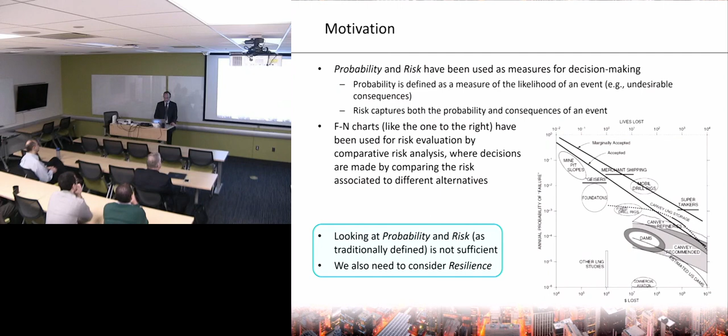However, looking at probability and risk alone is not sufficient. We also need to consider resilience. So today I will present a roadmap to promote societal well-being. I will introduce the concept of resilience, both as one of the most pressing characteristics of infrastructure and communities, as well as a necessary information for risk evaluation and decision making. I will introduce the concept of sustainability and its link with social justice.

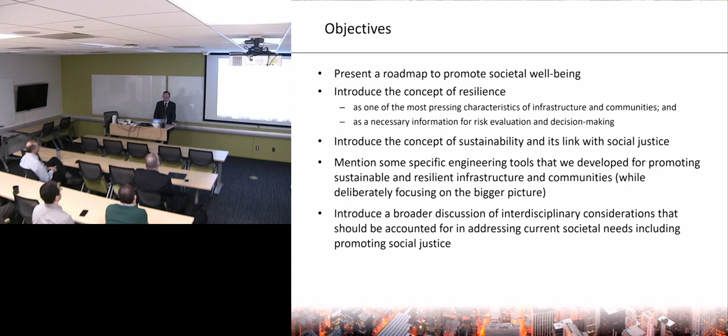While I will deliberately focus on the bigger picture, I will also mention some specific engineering tools that we develop for promoting sustainable and resilient infrastructure and communities. And finally, I will introduce a broader discussion of interdisciplinary considerations that should be accounted for in addressing current societal needs, including promoting social justice. This is the outline of my presentation, and I'll start by talking about regional risk analysis.

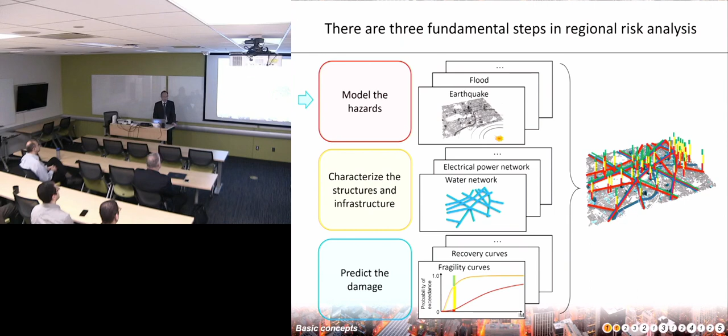There are 3 fundamental steps in regional risk analysis. We need to model the hazards, we need to characterize the structures and infrastructure, and then we need to predict the damage. So in terms of modeling the hazards, communities might be subject to multiple hazards like flood, earthquakes, tornadoes, fire. And accurate hazard modeling then requires accounting for the temporal aspects of the hazard. For example, for seismic hazards, sequences of main shocks and aftershocks all contribute to the overall damage. For weather-related hazards, climate change is impacting the likelihood of occurrence and magnitude of extreme events.

So as to the seismic hazard specifically, which will be largely the focus of my presentation today, we develop a 2-step method to generate main shock, aftershock, ground motion sequences. First, we use the branching aftershock sequence model to generate main shock, aftershock sequences of earthquake characteristics, like location, time, and magnitude. And then for each occurrence of an aftershock, we generate synthetic time history using stochastic ground motion models calibrated using aftershock data. In addition, accurate hazard modeling also requires accounting for the spatial variability of the hazard.

For example, in a region within 30 to 50 kilometers from an earthquake source, directivity effects might induce higher values of intensity measures along specific directions. The shape of the basin and the specific topography might result in amplification effects. And the characteristics of the soil and scattering phenomena might change the propagation path of the seismic waves. These factors limit the accuracy of the traditional ground motion prediction equations commonly used in seismic hazard analysis. And so we develop high-resolution, 3-dimensional, physics-based models that can capture these aspects.

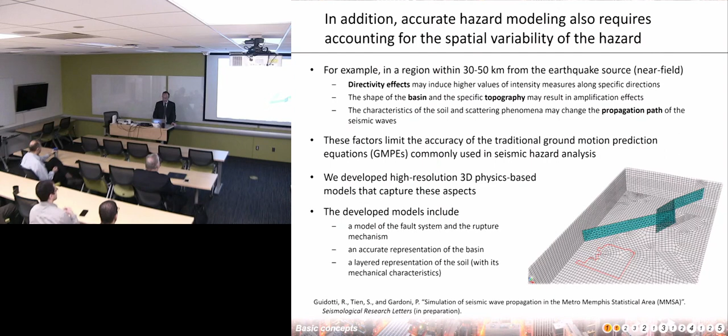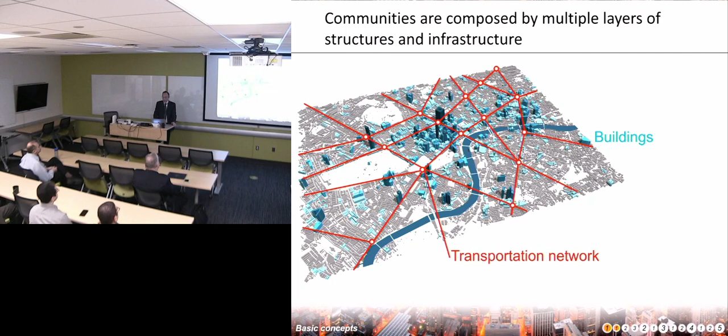Communities are then composed of multiple layers of structures and infrastructure. We have buildings, we have a transportation network, we have a power network, water network, just to mention a few. Each network then consists of a number of different elements. For example, in the water network, there are elements that serve the following 5 key functions: supply, transmission, treatment, pumping, and storage of water. The elements can then be divided into linear elements, like pipelines, tunnels, and canals, and point or nodal elements, like tanks, reservoirs, treatment plants, and pumping stations.

For a given region of interest, we need to define the footprint of each network. The footprint of each network might exceed the footprint of the region of interest. Different networks might have different footprints, and the definition of the footprint of each network depends on 4 key factors: the type of information of interest, whether it's physical damage or loss of functionality, the existence of easily recognizable physical boundaries and the possibility to model the boundary conditions, the existence and location of strategic elements that need to be included, like generation nodes, and finally, the modeling of the damage propagation among infrastructure systems.

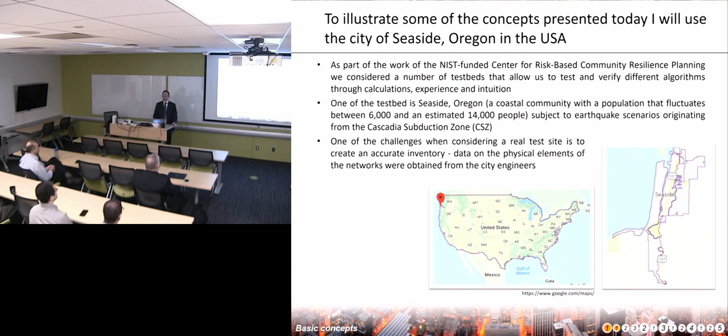To illustrate some of the concepts that I will present today, I will use the city of Seaside, Oregon. As part of the work of the NIST-funded Center for Risk-Based Community Resilience Planning, we consider a number of testbeds that allow us to test and verify different algorithms through calculations, experience, and intuition. One of the testbeds is Seaside, Oregon. This is a relatively small coastal community with a population that fluctuates between 6,000 and 14,000 people in season. They could be subject to earthquake scenarios originating from the Cascadia subduction zone.

So for Seaside, we modeled the water network at the city level because this is a self-contained, self-sufficient system. The transportation network is modeled at the county level and then extended to the larger city of Portland. The electric power network is modeled at the state level in order to be able to run a power flow analysis.

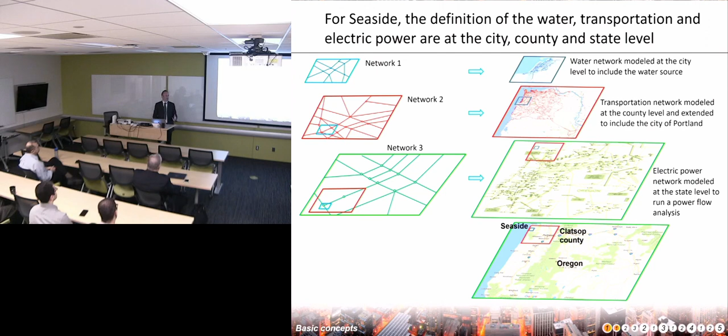Once we define the footprint of a network, we also need to define its granularity, if we want, the resolution of the model. So we define a tributary area as the area served by a single network node. And then by changing the tributary area, we can define networks with different levels of granularity. And in the limit, the most refined model considers each single parcel or house lot as a tributary area. Then the nodal value of the quantity of interest is the spatial average over the tributary area.

And in terms of modeling, different granularities affect our ability to describe the spatial variability of the impact over the area of interest, and I'll say more about this in the next slide, affect our ability to describe the changes in the network capacities and demands following a disrupting event, and affect our ability to describe the recovery process, since a skeletonized network would only include the main distribution line, but not the smaller ones.

It is important to capture the spatial variability of the impact over the area of interest because certain population groups might be more impacted than others or recover more slowly, and tributary areas that are too large would underestimate the actual societal impact. So the detailed network allows us to capture the variability within the larger tributary areas used for the skeletonized networks.

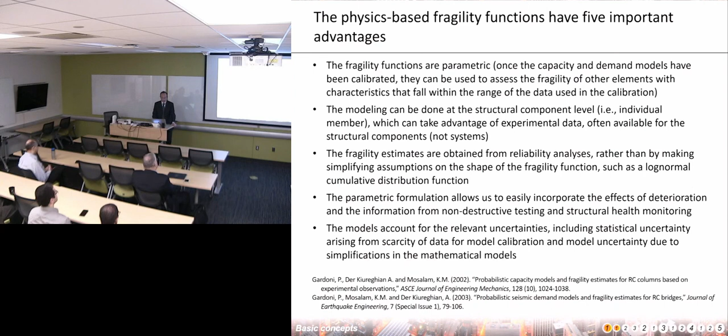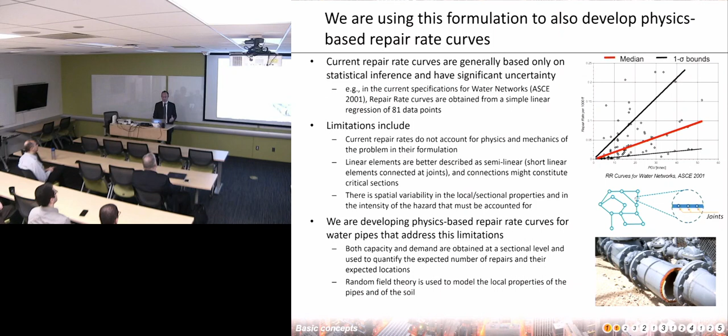We are now using the same formulation to develop physics-based repair rate curves that are intended to replace the purely empirical repair rate curves that can be found in the literature.

So far I talked about individual elements in the network. Then we need to bring in the connectivities of these elements, or if you want, the topology of the network. And this can be done using the adjacency matrix A, which is a matrix of ones and zeros, where 1 indicates that there is a direct link between two elements in the network, and a 0 indicates there is no such direct link. The adjacency matrix can be used to convert the physical damage to the individual components into its impact on the overall network.

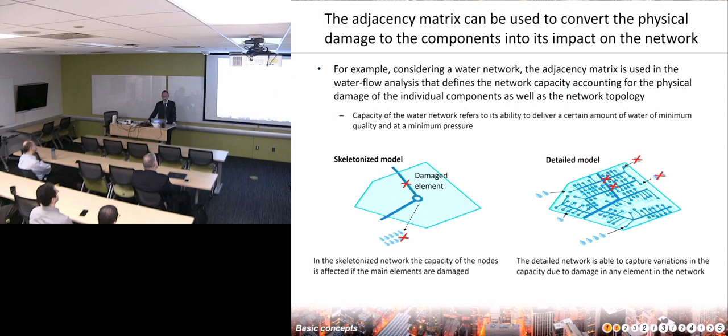For example, considering a water network, the adjacency matrix can be used in a water flow analysis that defines the network capacity, accounting for the physical damage of the individual elements, as well as the overall network topology. Capacity of the water network here refers to the ability of the network to deliver a certain amount of water of minimum quality at the minimum pressure.

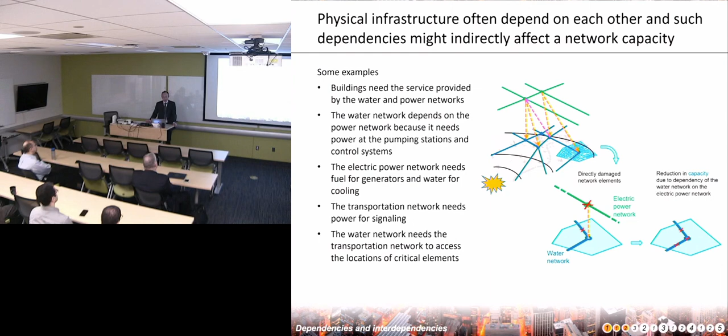Physical infrastructure often depend on each other, and such dependencies might indirectly affect a network capacity. For example, buildings need the service provided by the water and the power networks. The water network depends on the power network because it needs power at the pumping stations and control systems. So as a result, even if a network has no physical damage, there could be a loss or reduction of functionality of such network because of the physical damage and the corresponding loss of functionality of a supporting network.

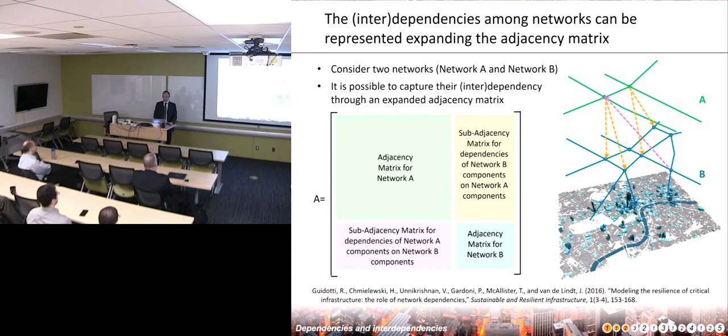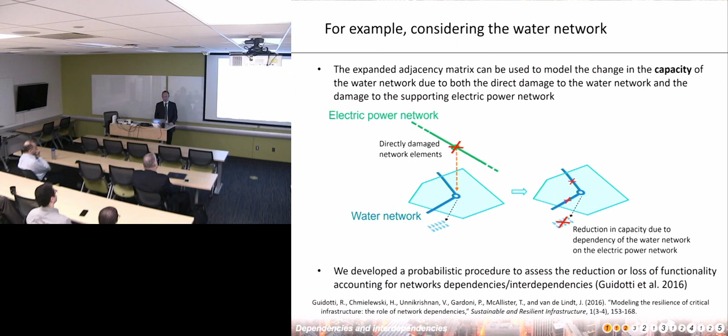For example, considering a water network again, the expanded adjacency matrix can be used to model the change in the capacity of the water network due to both the direct damage to the water network as well as the damage to the supporting electric power network. But not only the capacity, also the demand can be affected by dependencies. For example, building damage can lead to people dislocation that then affects the post-event water network demand. So the updated network capacity and demand can then be used in a flow-based network analysis to assess the functionality and reliability of the network.

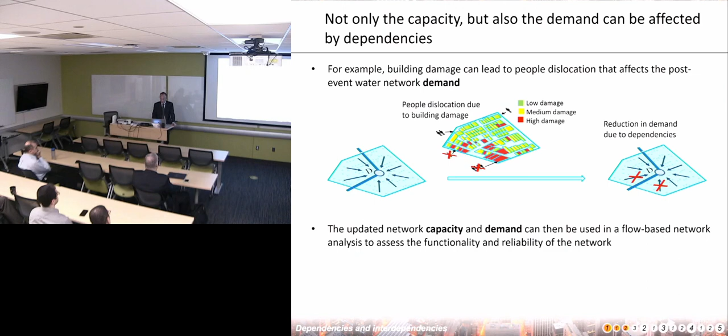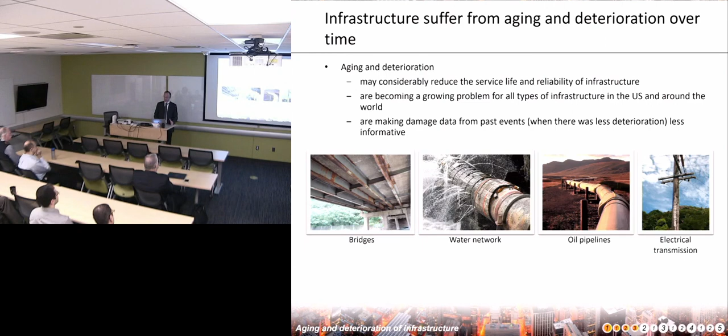Infrastructure might be subject to multiple deterioration mechanisms, which could be gradual, like corrosion or alkali-silica reactions, or shocks, like damage from past events. And changes in the material and geometry, what I called before the state variables, can lead to higher vulnerability to hazards, higher fragility curves, higher repair rates, and higher probabilities of failure or reduction of functionality. There could also be interaction between different deteriorations that can accelerate the overall deterioration process. However, current formulations available in the literature typically do not take into account the possible interactions between these different deterioration processes. So we develop a state-dependent formulation to model the deterioration accounting for these interactions.

The deterioration of the state variables x, or if you want, the first derivative with respect to time of x, is modeled as function of the external conditions z, as well as their own state. And then the changes in x lead to changes in the capacity of the system, as well as in the demand. And the updated capacity and demand models can then be used to estimate the time variant probability of failure. For example, considering a reinforced concrete bridge subject to corrosion and seismic excitations, the occurrence of seismic shocks accelerates the overall corrosion rate. So results show that considering the interaction of the two deterioration processes considerably affects the lateral stiffness, leading to significant changes in the fragility.

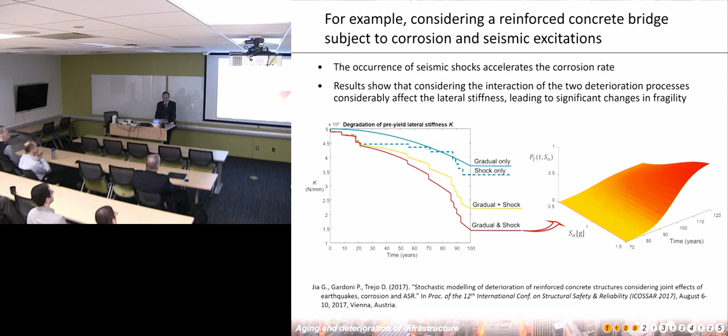There are also spatial variabilities, both in the state variables as well as in the external condition z. So we develop an improved latent space approach for modeling non-stationary spatial temporal random fields using physics-based regressors. A spatial temporal random field V is the collection of random variables at different spatial locations s and time t, and the non-stationarity means that the properties of V vary in space and time. So the proposed formulation considers different regressors as latent dimensions and then models the mean, the standard deviation, and the correlation in the random field as function of these latent dimensions. So the proposed formulation allows us to include the influence of physical regressors with a clear physical meaning in the definition of the random field.

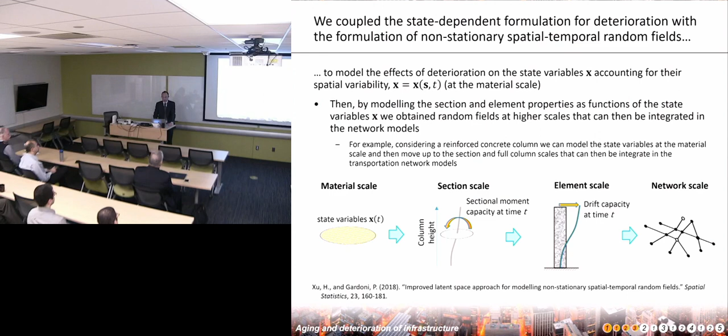We then couple the state-dependent formulation for deterioration that I showed you earlier with the formulation of non-stationary spatial temporal random fields to model the effects of deterioration on the state variable x, accounting for their spatial variability. All of this is done at the material scale, and then by modeling the section and element properties as function of the state variables x, we can obtain random fields at higher scales that can then be integrated in the network models. So this brings us back to the networks and the collection of networks that constitute the infrastructure in the region.

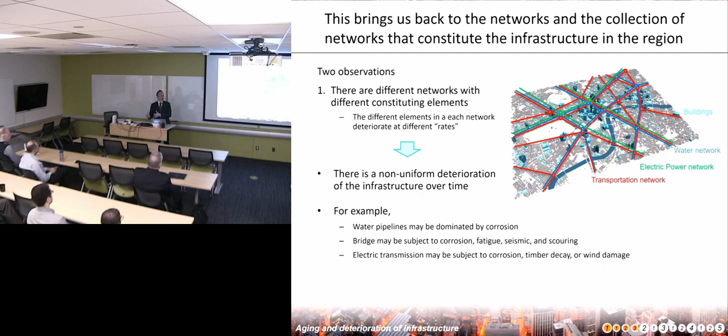So I have two quick observations. The first is because we have different infrastructure and each infrastructure is constituted of different elements, the deterioration rate can be very different, and a snapshot at time 0 can be different from a snapshot in 20 years or 40 years. The second observation is that even if we have two identical elements in the network, for example, two identical bridges, because of the spatial variability of the conditions that lead to gradual and shock deteriorations, their deterioration can be very different.

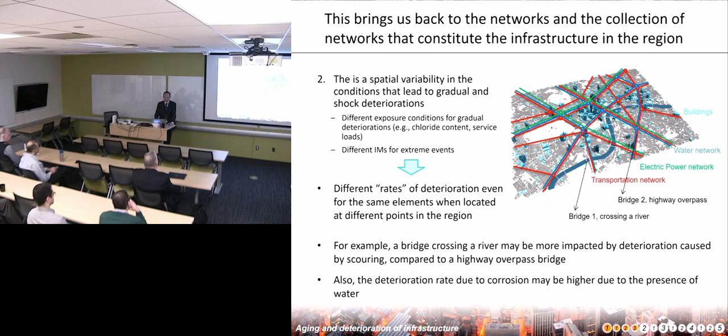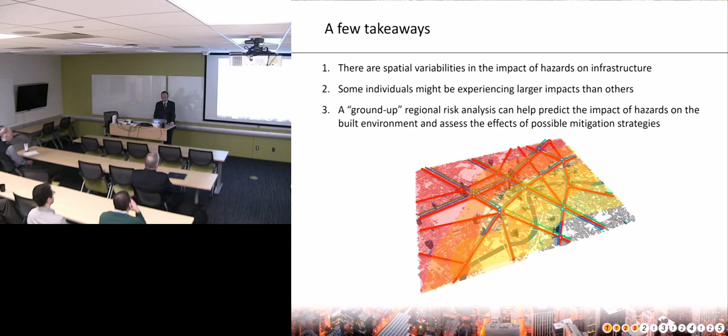So a few takeaways from this first third or so of my presentation. There are spatial variabilities in the impact of hazards on infrastructure. Some individuals might be experiencing larger impacts than others, and what I call a ground-up regional risk analysis can help predict the impact of hazards on the built environment and assess the effects of possible mitigation strategies. To look at the impact on the society, we then need to talk about social vulnerability.

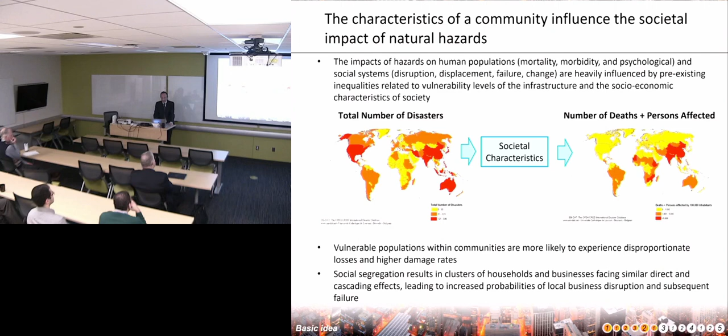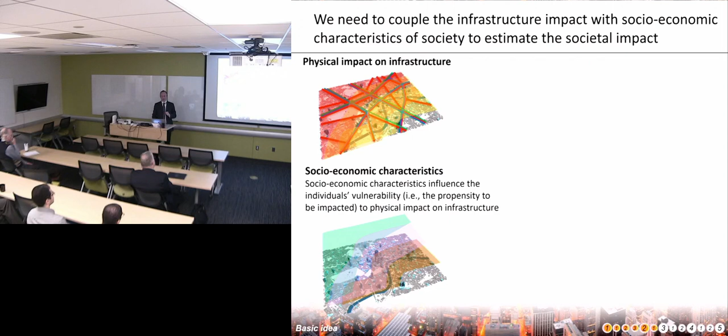The characteristics of a community influence the societal impact of natural hazards. The impact of hazards on human population, in fact, is heavily influenced by pre-existing inequalities related to the vulnerability levels of the infrastructure, as well as socioeconomic characteristics of society. Vulnerable populations within communities are more likely to experience disproportionate losses and higher damage rates. So we need to couple the infrastructure impact with the socioeconomic characteristics of society to then estimate the societal impact.

So we proposed a capability approach for assessing the societal impact of hazards. As background, Nobel Prize-winning economist Amartya Sen and philosopher Martha Nussbaum developed the concept of capability in the context of development economics and policy. The United Nations has adopted a capability approach to rank the well-being of individuals in countries around the world. There are two key ideas, functioning and capability.

Functioning refers to what an individual does or becomes in his or her life that is of value. Capability refers to the specific functionings that are feasible to an individual to choose to achieve given what he or she has and what he or she can do with what he or she has. So capabilities, or if you want, the opportunities that individuals have, are seen as dimensions of the individual well-being. So we propose to conceptualize and quantify the societal impact of hazards in terms of capabilities. So the impact of a hazard is captured by how it affects the genuine opportunities that individuals have.

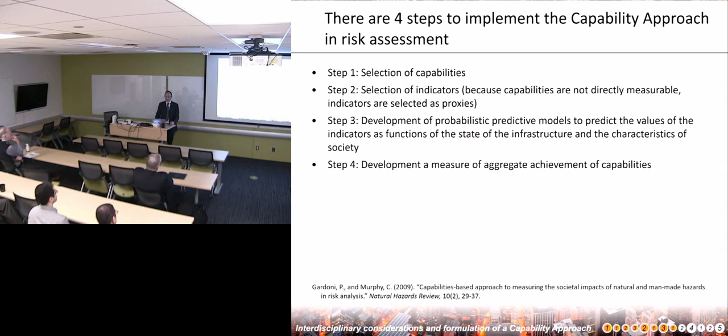There are 4 steps to implement a capability approach in risk assessment. First, we need to select the capabilities. Then we need to select indicators because the capabilities are not directly measurable, and so indicators are used as proxies. Then we need to develop probabilistic predictive models to predict the values of the indicators as a function of the state of the infrastructure as well as the characteristics of the society. And finally, we need to develop a measure of aggregate achievement of the capabilities.

So in terms of selecting the capabilities, there are 3 main considerations: significance and relevance, parsimony, and orthogonality or incommensurability. Significant and relevant means that the capabilities must be relevant to the problem of interest. Parsimony means that we need to choose the smallest subset of capabilities that include all important dimensions of well-being. And orthogonality or incommensurability means that each capability must provide information that is unique and that cannot be ascertained from any other capability.

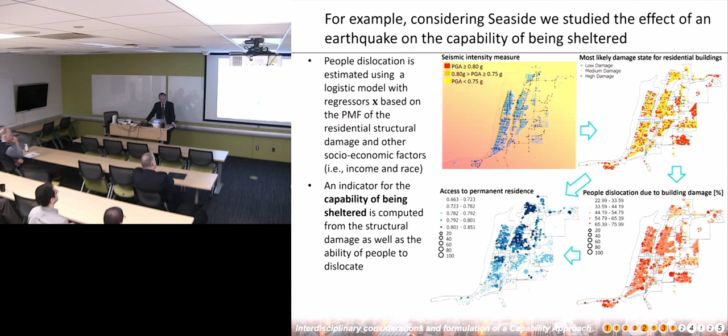So higher values of the indicator represent the ability of an individual to stay at his or her permanent residence. And this corresponds to not having significant structural damage. If there is significant structural damage, the indicator then assumes a lower value if the individual is able to dislocate to a temporary residence, and an even lower value if the individual is not able to dislocate to a temporary residence. And information on the ability of an individual to dislocate comes from the dislocation model.

Reliability analysis can then be used to create an aggregate measure, which is step 4, of the overall impact on societal well-being. The well-being of each individual can be seen as a system where the indicators define the system components. So the probabilistic models developed in step 3 can be used in a system reliability formulation to define the probability that the state of well-being is above or below a desired level. So performing a reliability analysis gives us an aggregate measure of well-being based on the level of achievement of each indicator before the occurrence of a natural hazard.

If a disrupting event occurs, it will have an impact on the structures and infrastructure. We can then, using the predictive model, obtain prediction of the value of the indicators of the quantity of interest, and then by doing, again, a reliability analysis, we can obtain a new aggregate measure of well-being based on the predicted level of achievement of each indicator, and this is after the natural hazards.

So we can now talk about risk evaluation. We define an acceptable and a tolerable threshold to delimit 3 states of well-being. The acceptable threshold is the lower capability attainment that is allowable in principle for individuals to have over any period of time. It captures demands for justice. In the words of Martha Nussbaum, a necessary condition of justice for a public political arrangement is that it delivers to citizens a certain basic level of capability.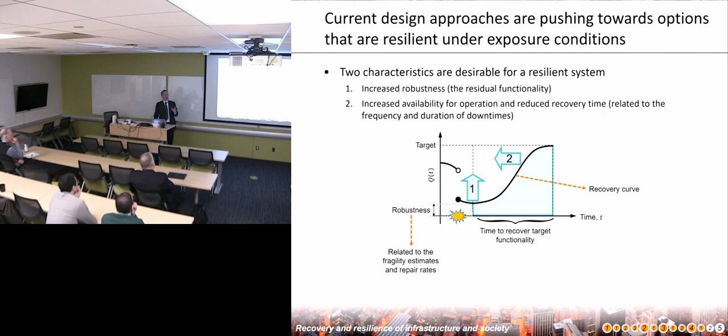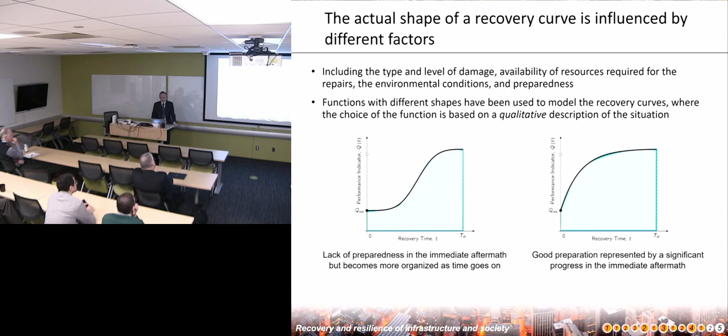At the same time, we want to accelerate the recovery process, which is tied to the recovery curves, which I will discuss next. The actual shape of a recovery curve is influenced by different factors, including the type and level of damage, availability of resources required for the repairs, the environmental conditions, and overall preparedness. Functions with different shapes have been used to model the recovery curves, where the choice of the function has often been based on qualitative description of the situation.

However, to model the recovery process in a more rigorous way, we develop a stochastic formulation that accounts for the actual work progress that needs to take place for the state variable x to recover. And we can then estimate the capacity and demand and the reliability and functionality over time, accounting for the relevant uncertainties. And we also combine the stochastic formulation for recovery with a state-dependent formulation for deterioration that I presented earlier that also works with a state variable x to perform a complete life cycle analysis

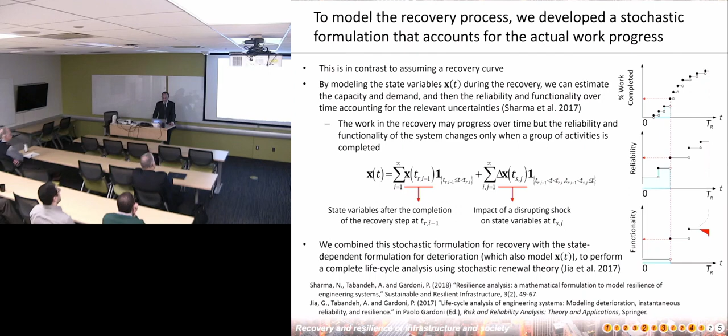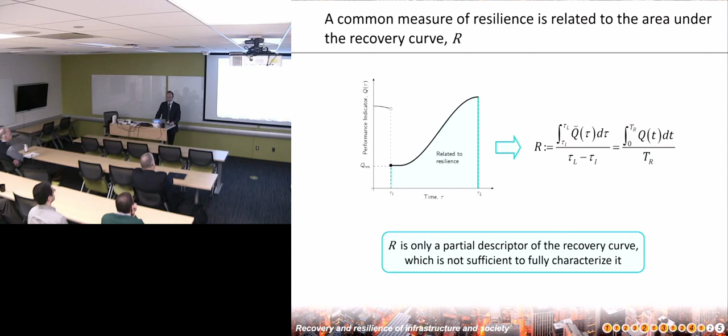using stochastic renewal theory. A common measure of resilience that can be found in the literature is related to the area under the recovery curve and is often indicated with the letter R. However, R is only a partial descriptor of the recovery curve, which is not sufficient to fully characterize it. So we proposed new resilience metrics that are analogous to the already accepted metrics in probability theory.

If we call Q the cumulative resilience function, in analogy with a cumulative distribution function of a random variable, then we can define the center of resilience, in analogy with the mean of a random variable. And we can define the resilience bandwidth, in analogy with the standard deviation of a random variable. The definition of these metrics is completely general and can be systematically extended to higher order metrics, like higher order statistics, to fully characterize the resilience associated with any recovery curve.

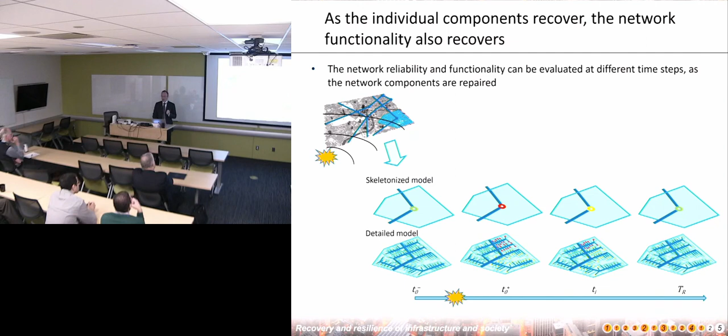As the individual components recover, the network functionality also recovers. For example, we look at the recovery of the water network of Seaside, and a flow analysis of the network with the state variable x, the variable time, with the reduced water demand due to population dislocation, allows us to assess the availability of the water at any node over time. And we can see that immediately after an earthquake, the damaged network is unable to satisfy the minimum pressure requirement. However, after about 6 equivalent days of repair work, we have a significant improvement.

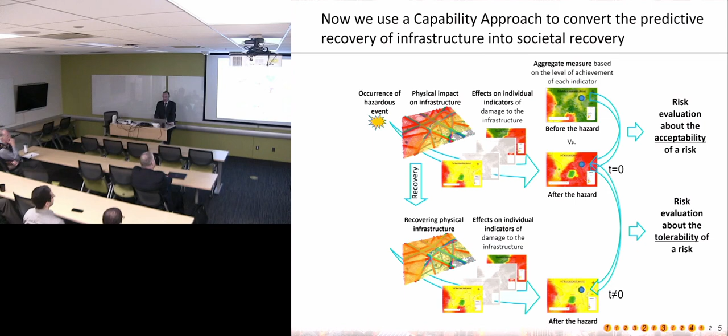So before, we used the capability approach to convert the predicted impact on the infrastructure into a societal impact. This is the same figure, I just made it smaller and I put the time t0. And now we can use the capability approach to convert the predicted recovery of the infrastructure into a societal impact at a time different from 0. And so by comparing the aggregate measure of achievement of the indicators before and immediately after, we can evaluate the risk, whether it's acceptable or not. And by looking at the recovery, we can evaluate the tolerability of a risk.

We implemented a capability approach using a dynamic Bayesian network, which is ideally suited for implementing a capability approach because the size of the network is not large, the network is not densely connected, and the variables are often discrete with only a few states.

What I presented today are a number of nested models, where the lower level nested models provide input into the higher level models. All of these models have a set of parameters that generically are called theta here. They are often assessed or calibrated independently. So we develop a Bayesian updating for probabilistic multi-level models of interdependent infrastructural systems using heterogeneous field data. The methodology allows us to update the model parameters in all of the lower level nested models, considering different data types as they become available during the recovery.

We can now talk about sustainability and link it with what I said earlier. There are three key aspects in sustainability: environmental justice, global justice, and intergenerational justice. According to environmental justice, a flourishing natural ecosystem might be seen as good in itself and for instrumental reasons insofar as a flourishing natural ecosystem is important for the well-being of individuals.

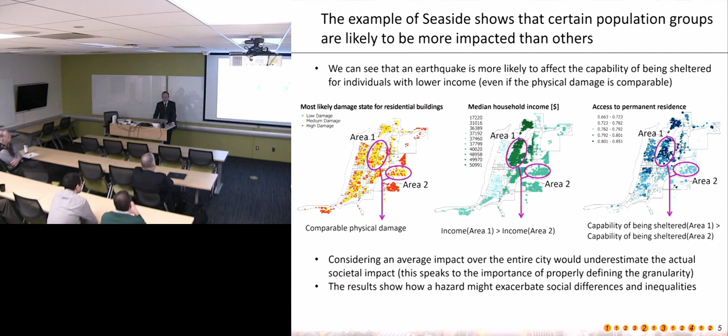And this speaks to the importance of properly defining the granularity of the model that I introduced at the beginning of my presentation. The results also show how a hazard might exacerbate social differences and inequalities. So fairness in the distribution of the impact and recovery should be accounted for in risk evaluation.

So in parallel to what I said earlier for the evaluation of risk at the individual level, one way to take into account these justice-based considerations is to define ranges of permissible inequalities. If the inequalities are likely to be exacerbated too much, either in space or time, then the risk might not be acceptable. If the exacerbation is limited, then the risk might be tolerable as long as the exacerbation is temporary.

Moving forward, we also need to incorporate the role of insurance, since it can play an important role in redistributing and transferring risks and provide financial tools for recovery. We need to consider the ability of individuals to adapt and recover independently from the recovery of the built infrastructure. And we need to pay more attention to the quantification of the costs and benefits of mitigation strategies, urban planning, and public policies to find an optimal solution.

So in summary, natural hazards can exacerbate social differences, but what we call a society-based design of infrastructure can promote social justice. Natural hazards can exacerbate social differences because of different exposure to hazards, different exposure to climate change, different exposure to deteriorating conditions, different social vulnerability, and different access to financial tools.